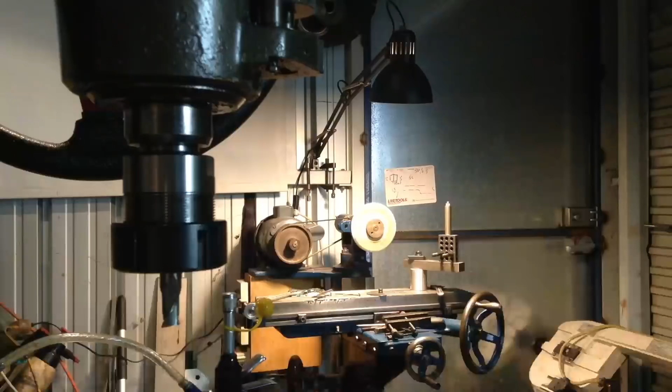So we ground up a tool, somewhere, there it is. We ground up a piece of high speed steel in the cutter grinder, which is over there. Yeah, so we don't get much use out of the cutter grinder, but it's handy to have.

We'll get a lot of use out of it shortly once I get it properly set up. But we do desperately have to make a guard for the grinding wheels on it, a couple of different size guards, just to make it a bit safer, just in case. You never know.

So anyway, we've had fun and games with that today, so we'll head over and...

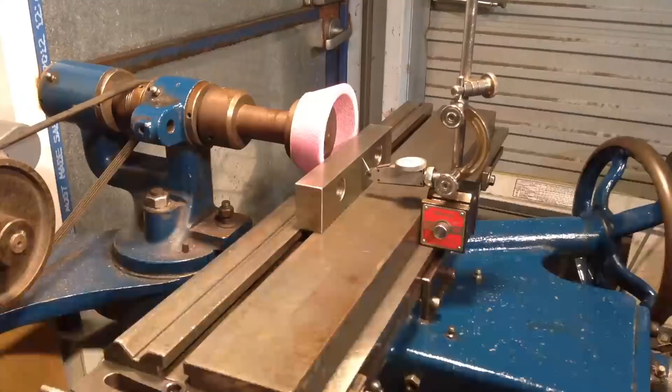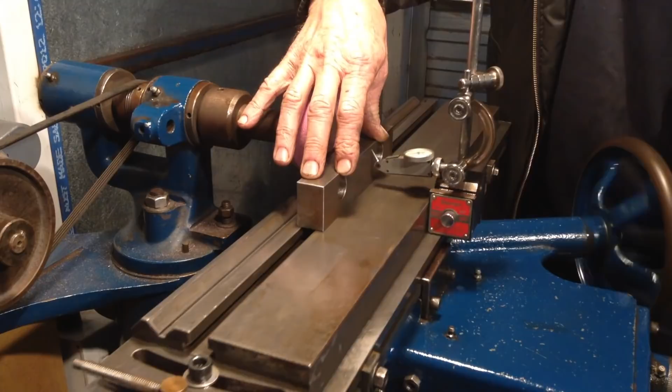First thing I want to do is make sure the axis of the table is running parallel with the grinding wheel. So just got a piece of material there, I'll just hold that lightly with my fingers, traverse the table. We're within a couple of thou, that's fine, it's pretty good there.

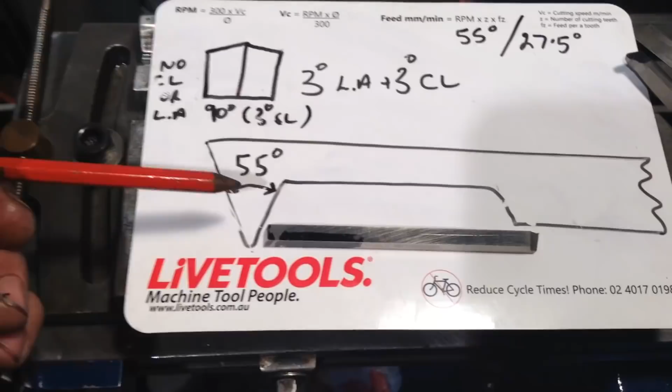Here's a bit of a sketch of our threading tool that we're going to grind up, and this is the tool blank we're going to use. Because we're cutting a BSW, British Standard Whitworth thread, that has an included angle of 55 degrees, the first face we're going to grind is this face here, ground to half of 55, which is 27.5 degrees.

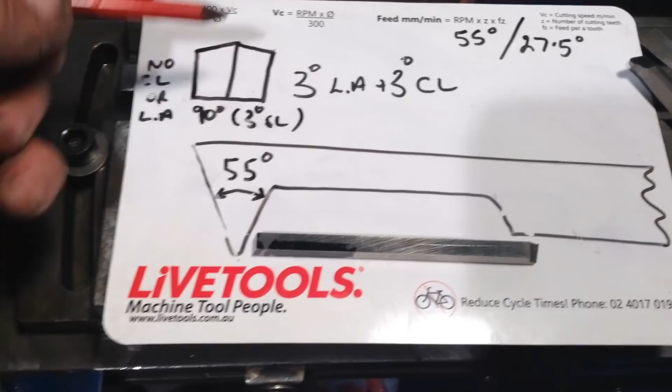So we'll grind it a straight grind, straight across. This edge is the trailing edge of the tool, which represents this face here. The trailing edge, we do not need any clearance ground into it, so that can be just a 90-degree grind. Because it's a left-hand thread, the lead of the thread coming down here will provide the clearance necessary.

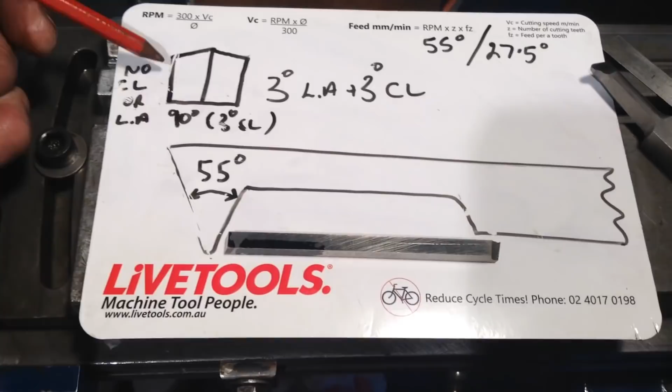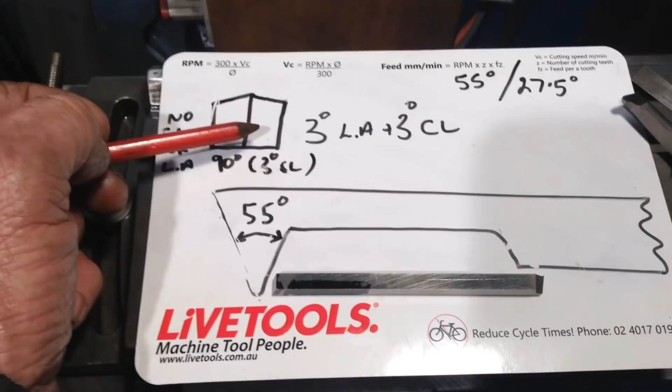So let's get this side ground and then we'll move on to the other side. We've got a howling storm outside, so bits of trees are flying everywhere. We had a power cut earlier on.

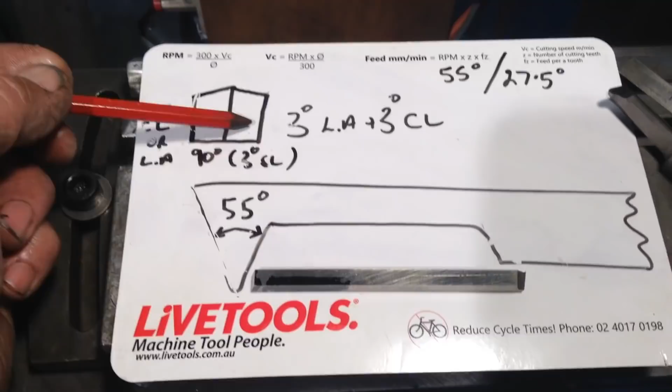When it comes to grinding the other side, it's a different story. We have to account for 3 degrees of lead angle because of the slope of the thread coming down, so the tool doesn't rub, plus 3 degrees of clearance. So this will have a total of 6 degrees and this will have a total of 3.

So let's get this tool blank set up in my honky tonk grinding fixture, and we'll do that first edge. I have a simple setup: just a 1, 2, 3 block clamped down onto a couple of other bits of material and an angle protractor so I can set the angle of the tool. All I have to do is just slacken off the 1, 2, 3 block.

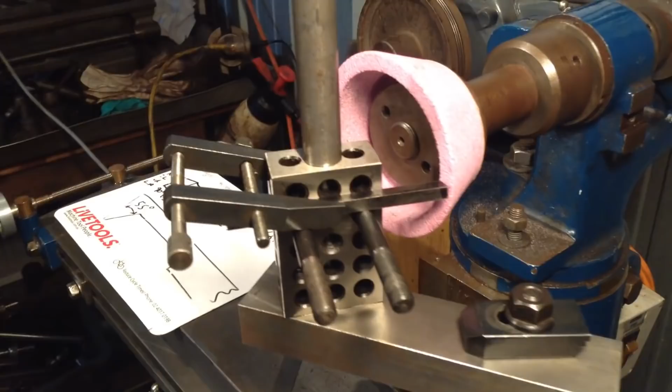And come in close to the wheel. Once we're touching the wheel like that, our angle is set at 27.5 degrees. It's just clamped in place against the 1, 2, 3 block, sitting on a couple of pins that are in there. We'll get the grinder fired up and we'll grind our first angle.

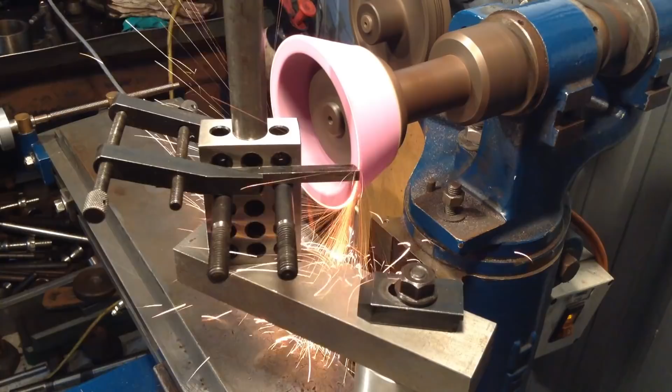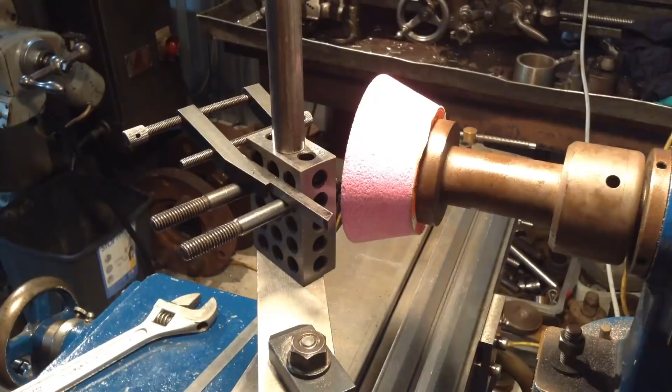Right, well that went easy, so we'll take it out and have a look. The two studs there just keep it at 90 degrees in relation to the wheel. That's our first edge, so that'll be the trailing edge of the threading tool.

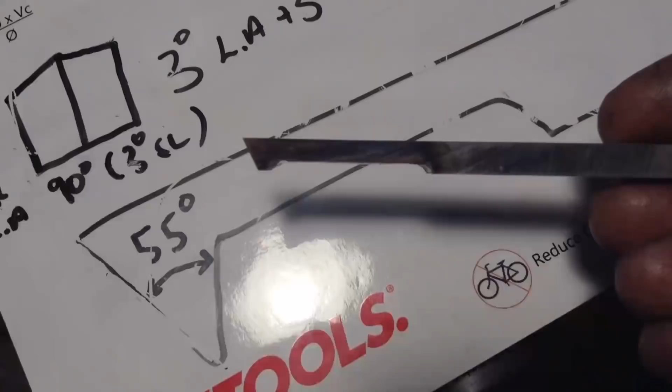So we'll set up now. What we'll do is relieve a piece out down here, then set up to do our other edge. Just to save time, I roughed this out with an angle grinder on that cutaway. Now as you can see it's discoloured the high speed steel, but it doesn't matter if it discolours - you can grind it all day and have it blue like that, it will not affect the high speed steel. This is a piece of M42 cobalt high speed steel, so it's pretty good stuff anyway.

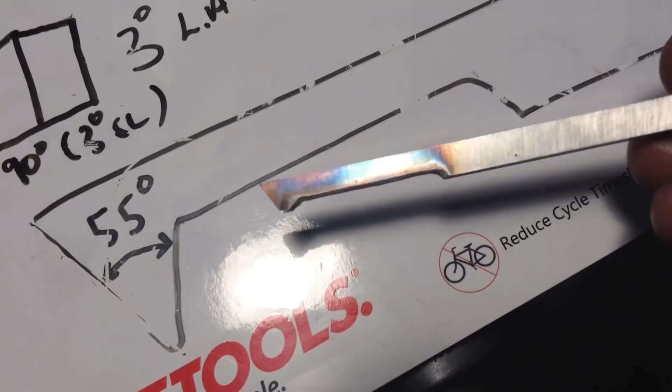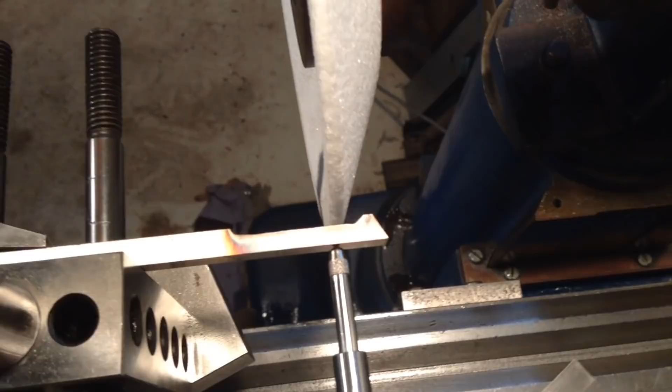So we'll get a wheel set up and tidy this up. We're just set up now to tidy up that area I ran over with the angle grinder. We've got the tool steel set up running reasonably parallel, as close as it needs to be anyway. We'll clean this area up, then dress the wheel and cut the other angle on the tool for the leading edge. Remember it's a left hand thread, so the leading edge is to the rear.

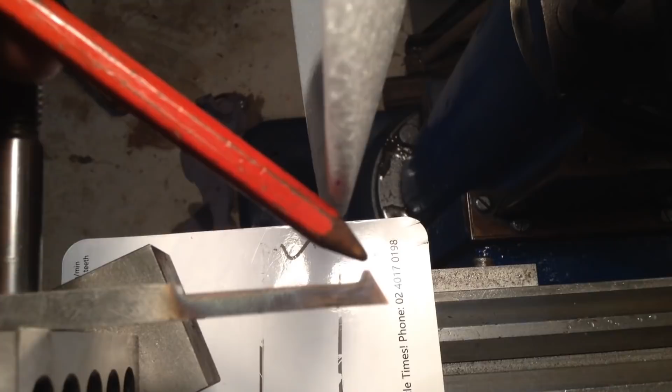So you can see our tool there starting to take shape. It's just this edge here which is the leading edge, so we just have to get that to the correct angle.

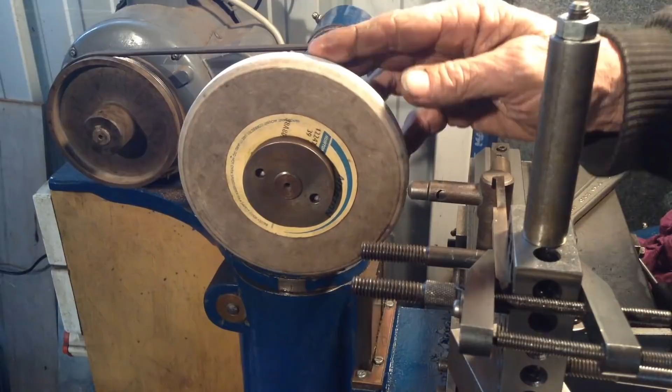So I swapped over to an 80 grit wheel, a fine wheel. I'm hoping it will hold its shape for the back grind of our cutting edge there. I'll just take a clean up on the other side. It should be good.

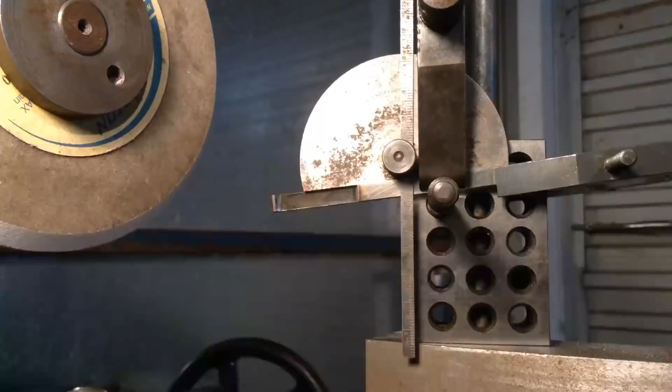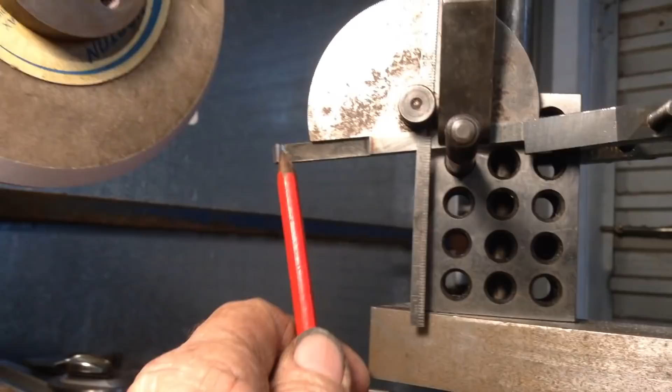We've inclined the tool down at a 6-degree angle, and this is before we set it around to the 27.5 degree angle. This angle gives us clearance in this area on the leading edge of the tool. So you've got 3 degrees for your clearance and an extra 3 degrees for the lead of the thread. So in total, when it's cutting, it would give a 3-degree tool clearance.

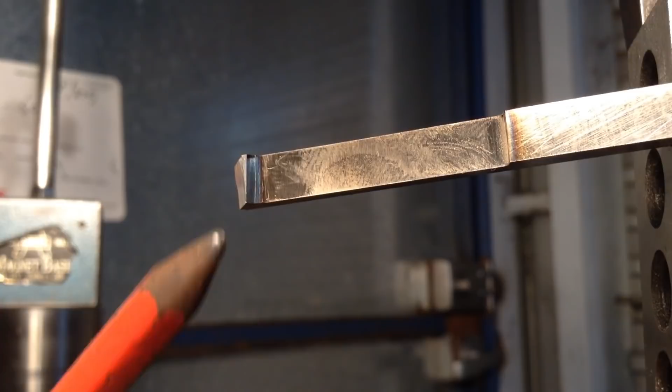Right, we'll have a look at that. Should be able to see at the bottom we've got a point, and at the top we've still got a flat, so we've got to keep grinding until that flat reduces right down. A little bit of a flat's fine. Ideally I'd like to see half that width of flat. BSW thread has a radius at the crest, so we can hand stone that in, but I'd like to see that flat greatly reduced, so we'll take a bit more off. And there's a shot from above.

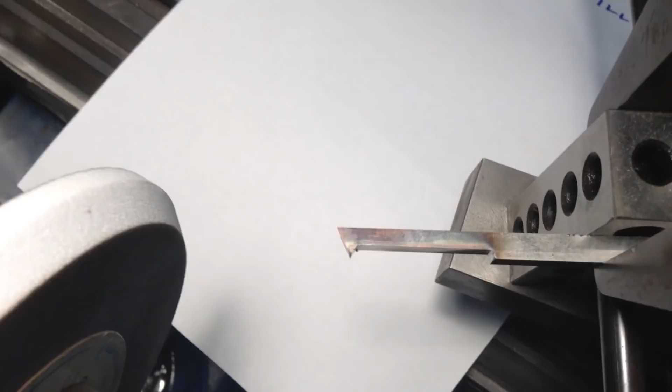Okay, that should do it, I hope. We're just grinding in some clearance on the underside of the cutting edge, just so it doesn't rub on the bore that we are threading.

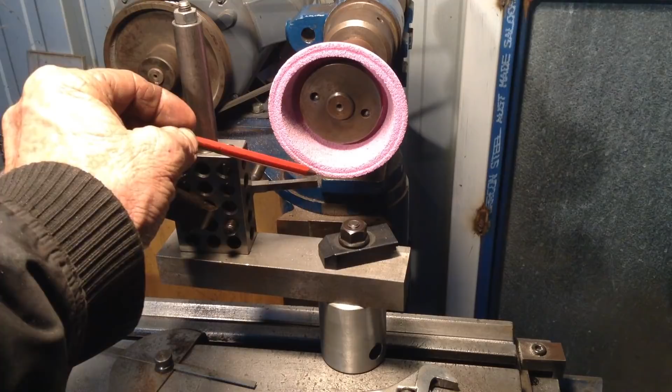Okay, we're just going to grind a bit of a top rake on it, so about a 6 or 7 degree top rake, and that'll slope back from the rear leading edge.

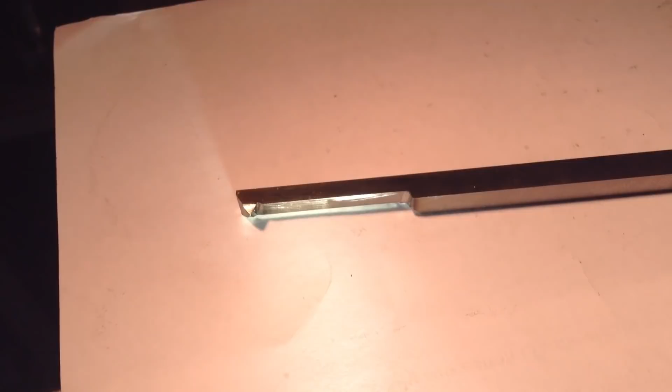Okay, there's our finished product. So she's all ready for a test cut. Our angle came up very well, so we've got a nice bit of clearance in here for when we take our cut.

Now the trailing edge, that's ground with no clearance - the lead of the thread will provide the 3 degree clearance. The front edge, the edge that's going to be doing all the cutting, the leading edge, has 6 degrees, to allow for 3 degrees of lead angle plus 3 degrees of clearance. So all the cutting will be done on this face.

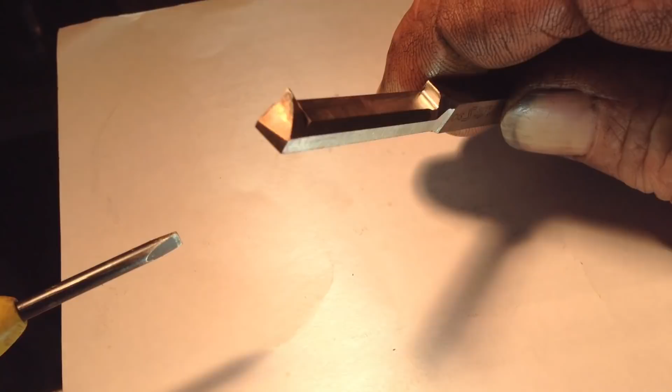Then we have, it's hard to pick it up, but we do have a top rake ground in at a slight angle, about another 6 degree angle there, as this edge is going to be doing all of the cutting. And we should hopefully have enough clearance underneath - so you can see that top rake there. So we'll pop her in the lathe and give it a run.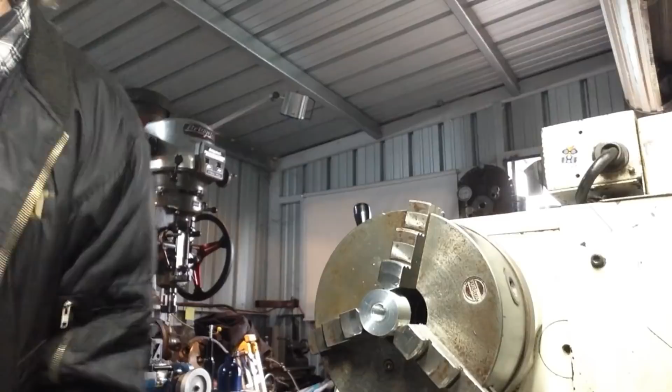Give that a bit of a test fit, see how we're travelling. Tad more to go yet.

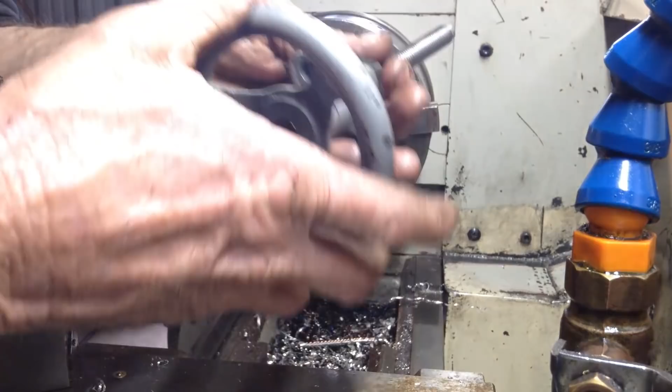It's one thing with this lathe, the half nuts have a real bitch of a feel to them. Like they'll grab when you don't want them to grab. If you're engaging in that wrong spot, I try and engage it so it just rests on the crest of the thread and then drops in. But that's on this lathe too, why you can't screw cut at a high speed, because the half nuts won't disengage.

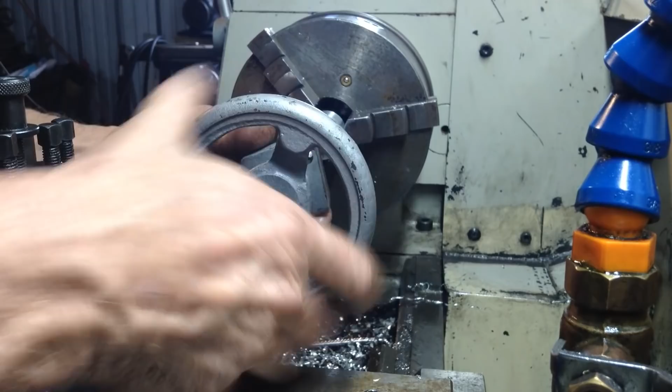It's going in, but it just needs a tad more just to give it a bit of clearance. What I'm doing measuring, I'm just making sure it hasn't pushed up too much of a burr. Let's just take another couple of cuts for some clearance and it should be good. We'll chamfer the front first.

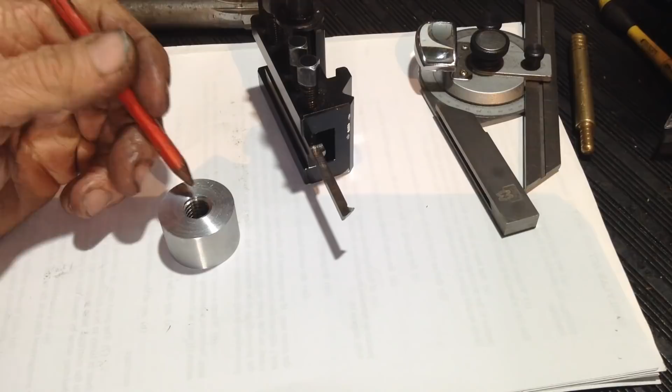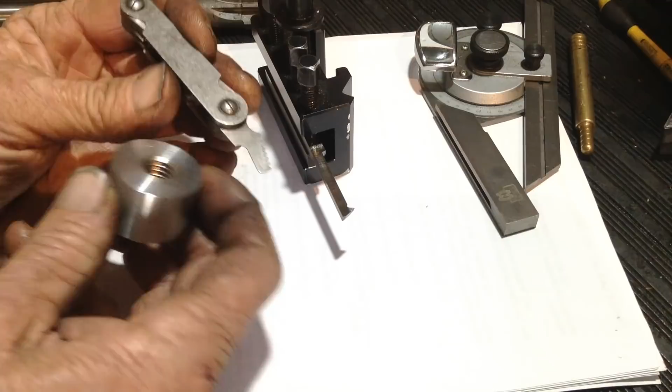The reason we did a test subject is because it's such a small thread. The bore on the thread's only 300 and I think I made it 397 thou. When you set up for screw cutting, you normally use your pitch gauge and just verify the pitch you're cutting. Well, it's pretty hard to do that in this case because the thread's so small. So that's one reason why.

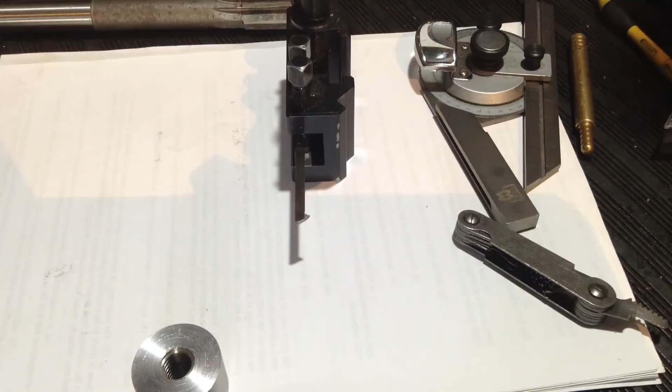The other reason was our new tool that we just ground up. It's a good test run for that to see how that managed. Now, I cut the thread fine, but what we did have to do is I did pull it off camera. I pulled the tool out twice, and underneath just gave it a bit of extra clearance there. So what I was doing, I was blackening it up with a Sharpie marker, and I was taking cuts until I heard any noise that wasn't normal, like a bit of a rub noise or something like that. So then you can immediately pick up the wear marks off the Sharpie where you have to give the tool extra clearancing underneath. So we managed to get to full depth without any big dramas. So the tool worked well.

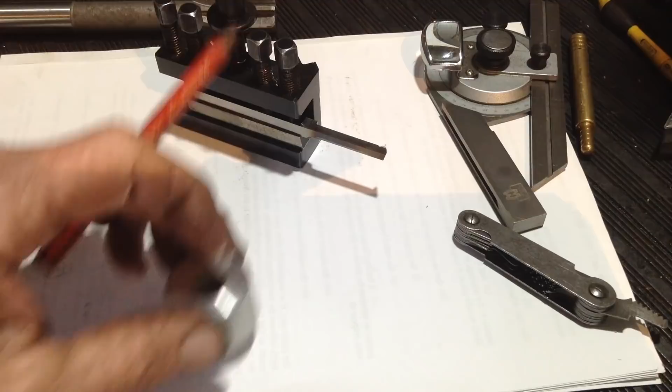So I'll just swing around back to the lathe. Normally when I screw cut, I'll screw cut with my compound 90 degrees this way, unless it's a really big thread. It's just the way I prefer to do it. This left hand thread, we've angled the compound round to 27 degrees. 27 and a half is half of 55, so 27. But the angle that we've got it at is the same angle if you're cutting an external right hand thread.

So our cutting edge was on the rear of the tool, so we're pulling the tool back into the bore to cut the thread. And if we had it angled the other way, we'd be cutting on the trailing edge of the tool, which is no good. And you would have seen too that we're feeding, because it's a left hand thread, feeding away from the chuck to cut the thread. So that's our compound setup.

Well, okay, we had a win in the end. We sorted out our little test piece, so we know our tool works. We had a bit of a run with the cutter grinder to grind up our tool, so I suppose the next logical step is if we machine up this quill. So we'll get that all roughed out, we'll cut the thread, and hopefully it will come out like the one we've just done on the trial.

So as you can see, it does pay off to have a trial cut with a new tool rather than risk scrapping a part. If you've got to take the tool in and out, or in this case it was easier to take in and out, but you don't want issues in the middle of cutting a thread on your finished part, because such a small thread, let me tell you, if you've got to pull that tool out or for any reason try and chase that thread again, it's a mongrel of a job on a small thread, trust me, it is.